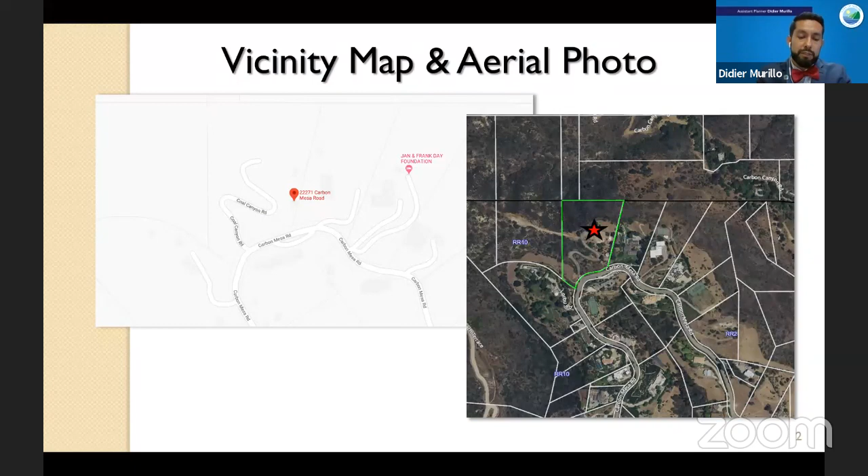Next slide, please. The property is located on the north side of Carbon Mesa Road along the northern edge of the city boundary in the rural residential 10-acre zoning district and is approximately 6.3 acres in size.

Next slide, please. The proposed scope of work includes a new 10,350 square foot, one-story, single-family residence not exceeding 18 feet in height, with an attached 820 square foot four-car garage and 992 square foot basement, swimming pool and spa, fire department turnaround and driveway improvements, retaining walls not to exceed 6 feet in height, decks, hardscaping, landscaping, 835 square feet of open air trellises, 976 cubic yards of non-exempt grading, a 5,000 gallon below grade water tank and a 25,000 gallon below grade water tank, and an on-site wastewater treatment system.

The below ground water tanks will allow the fire department access to water in case of a fire. Therefore, the accessibility of the water tanks and the location of the proposed project will benefit the surrounding properties as it will serve as a fire break and allow the Los Angeles County Fire Department to fight fires from that location.

The project also consists of site plan review number 18-027 for 2,611 cubic yards of remedial grading due to slope failures in 3 locations, and demolition permit number 19-022 to demolish the existing foundation, trash enclosure, swimming pool shell, on-site wastewater treatment system, and front yard gate and walls, which were left behind after the 1993 fire.

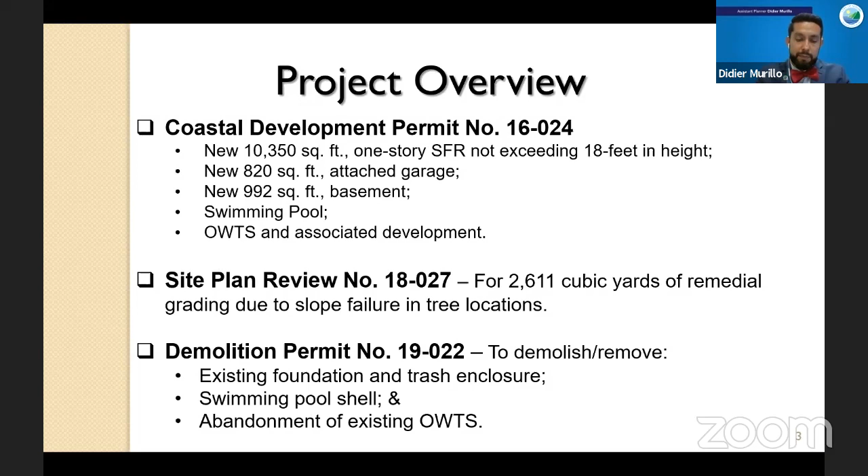Next slide, please. The project was scheduled for the August 5th, 2019 Planning Commission meeting. Staff requested a continuance of the subject item to allow the applicant time to provide an exhibit depicting existing and proposed fuel modification zones. Staff communicated directly with the Los Angeles County Fire Department Forestry Division and confirmed that the minimum requirement for a fuel modification is 100 feet.

With most projects requiring the thinning of vegetation beyond the initial 100 feet up to 200 feet. Traditionally, almost all projects that require a fuel modification plan have been designed to comply with the 200-foot fuel modification area. However, it is the Forestry Division policy to allow a reduction to the standard 200-foot fuel modification in cases where there are important biological resources, in an effort to avoid or minimize impacts to significant biological resources.

In these communications, it was confirmed that the required fuel modification for the proposed residence has been reduced to 100 feet, where environmentally sensitive habitat area currently exists. Here we have the approved fuel modification plan stamped on March 16, 2020. Next slide, please.

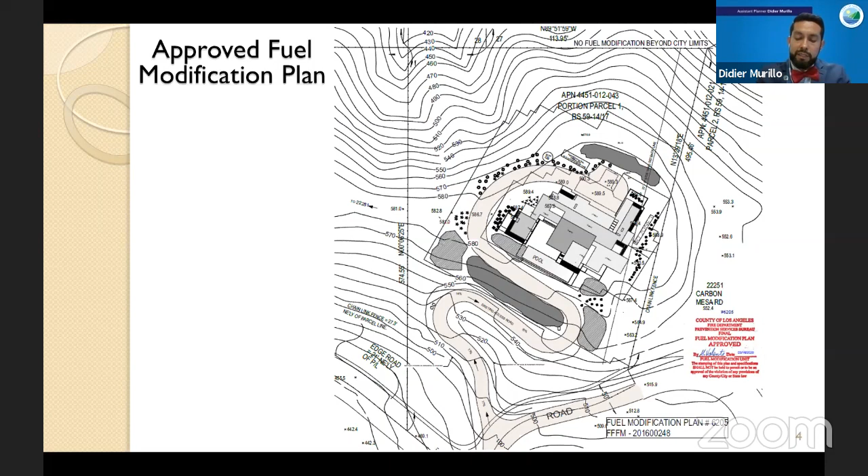Here we just have the site plan. Next slide, please.

The project includes site plan review number 18-027 because it proposes remedial grading to reconstruct the slope adjacent to the driveway and adjacent to the required fire department turnaround. The property experienced slope failures in these areas due to the drainage devices that were left unmaintained by the previous owner after the old Topanga fire destroyed the residence and associated development.

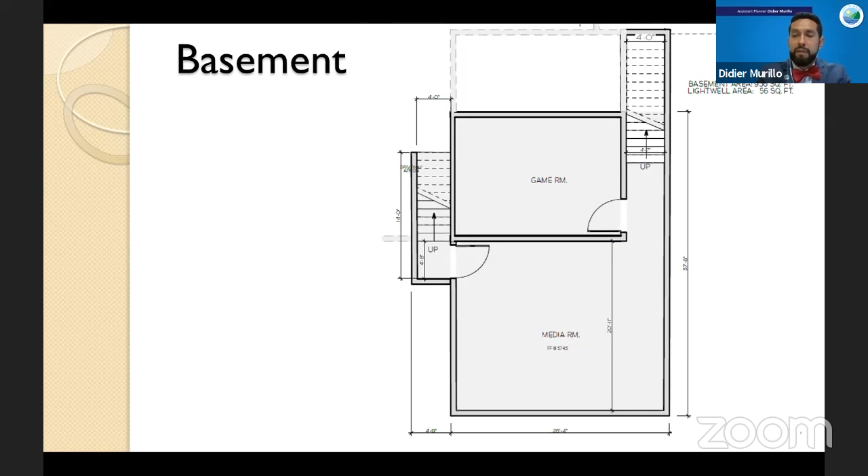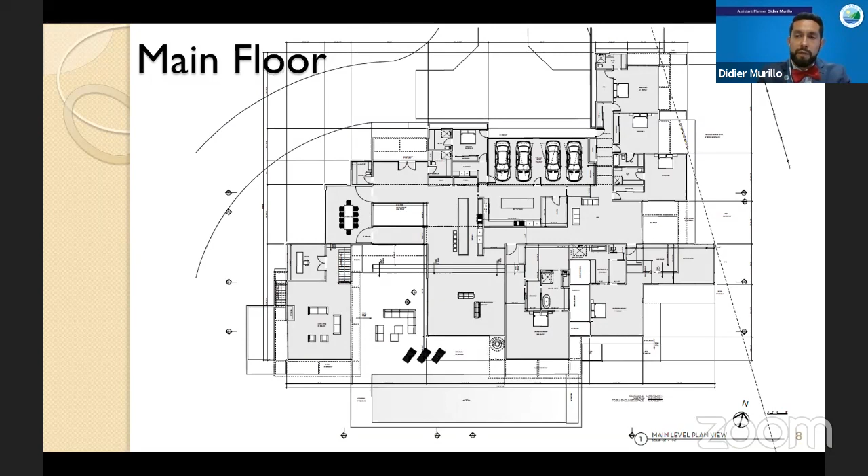The project includes a basement, which is comprised of 936 square feet plus 56 square feet for the lightwell area. Next slide, please. The main floor is comprised of a 10,350 square foot, one-story single-family residence, not exceeding 18 feet in height, with an attached 820 square foot four-car garage, for a total of 11,170 square feet. Next slide, please.

Here we have story pole pictures taken on Thursday, August 27, 2020, where we can see that the proposed project will be sited completely on the flat, previously disturbed building pad.

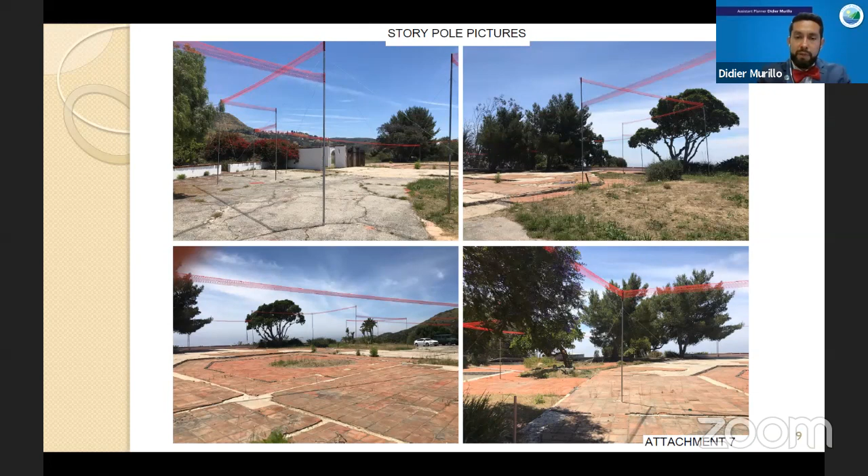Next slide, please. In summary, staff recommends that the Planning Commission adopt resolution number 20-59, approving the proposed project as conditioned. This concludes my presentation. The applicant and staff are available for any questions you may have.

Thank you. Okay, can we have disclosures? Who'd like to start?

Steve? Yeah, went up to the property. I had two big questions. One, there is nothing in the staff report that talks about a landscape plan, and I believe that's a requirement. And there's nothing in the staff report that demonstrates a slope analysis, and they're talking about stuff with slopes. So typically I would be able to deal with some of those issues with a site visit - I go up, take a look, see what it looks like, ask questions. So I scheduled a site visit and couldn't get on the property. The person who was Vitas, for a whole bunch of reasons why that didn't work out, Vitas didn't show up. I couldn't get on the property, so I had no idea, I couldn't get my questions answered. There's nothing in the staff report today that deals with a slope analysis or a landscape plan. So I'm going to make a motion once we get into this to continue this till some point in time till we can get that information. That's more than you want to know at the moment.

Okay, next. None for me. Chris, none here. David? I visited the site. Vitas was there. I walked around, asked him some questions, and then, like everyone else has, I've read all the correspondence that has come in from various neighbors.

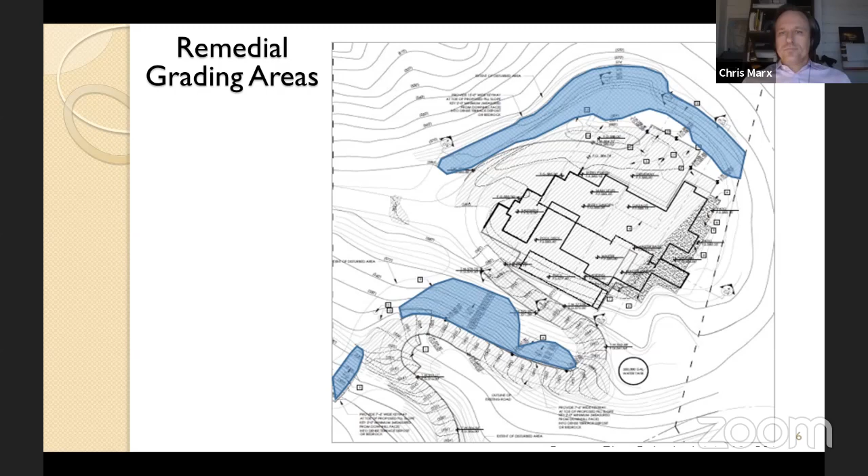David? Yeah, I guess I'm confused. If there's going to be a motion to continue this until information is provided in writing that isn't here right now, it does not make sense to me to then get into half a discussion now, then decide to postpone this and do it all over again. If we know ahead of time that this is going to be postponed, then let's postpone it. I just don't see what purpose this is going to serve.

Okay, point taken. Do we have a second? I'll second it for a vote.

But I'm only saying that if it's the intention of Steve and possibly Chris to postpone it - there is documentation that I believe is required, I'm not arguing - or a landscape plan, and if it's not there, how did this get to this point without that? So I'm going to make a motion to continue it, yes.

But we have to have public comment first. I would suggest that you give the applicant a chance to address the issue, and then if you feel that way afterwards - he can address it, but unless he's going to show me a landscape plan, I don't know what I'm going to see. Right? He can tell me about it. You can produce it, or you can explain why it's not required. No, he can't produce it tonight because we haven't had a chance to look at it.

It was supposed to be in the plans that the city sent us. It's identified as being in the plans, but it's not there. And if it's not there, I can't review it. If it's supposed to be there and it isn't, we shouldn't approve this piece of property.

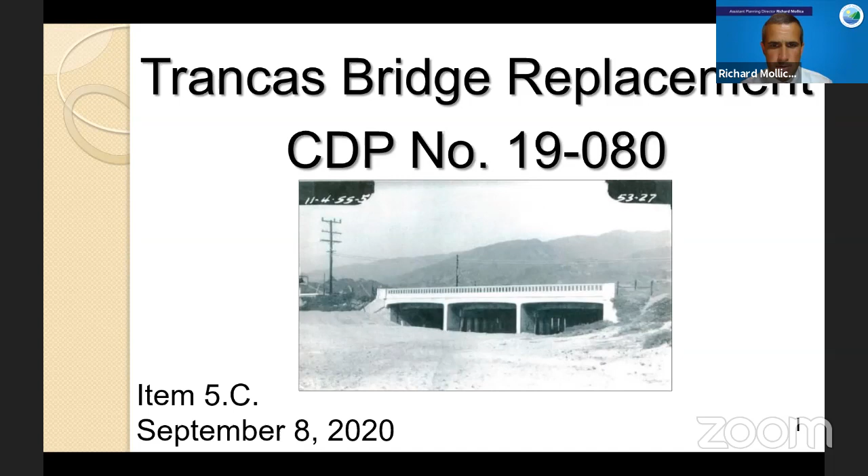As discussed, this is for the replacement of the bridge that's along Pacific Coast Highway that crosses over Trancas Creek and leads out towards Zuma Beach and the Pacific Ocean. If I may have the next slide, please.

This slide shows the project area, the area that was studied for impacts, or potential impacts, as part of the initial study that resulted in a mitigated negative declaration for the project. The different colors represent the different types of land uses. We have a range of land uses surrounding this, from commercial to residential to open space to public open space, such as Zuma Beach.

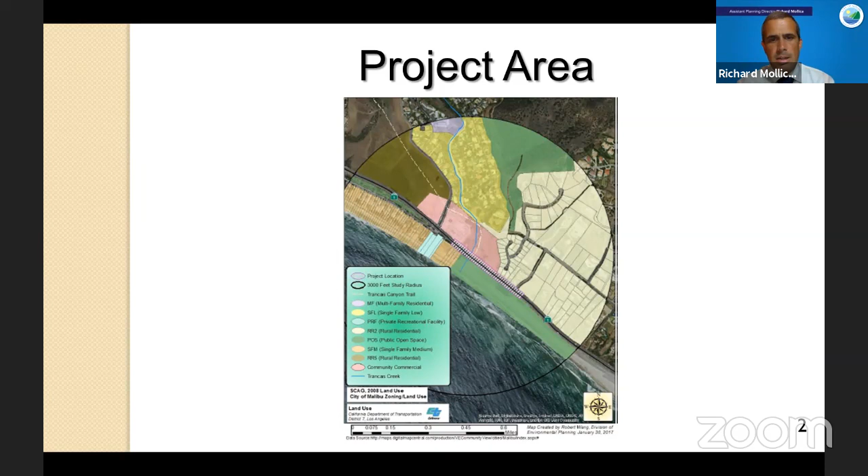The purpose of that wider span, rather than just replacing this in kind, is because there is talk of a potential project on the former Riders and Roper site, just inland of the bridge. That potential project would be undertaken by the National Park Service, as part of a Trancas Lagoon and Creek restoration program. As part of that, there was a request made to Caltrans by the Park Service that a wider opening be made so it would be easier for flows to make their way towards the lagoon, and also when water comes in from the ocean side, it would result in a greater amount of flow for the lagoon restoration program. If I may have the next slide, please.

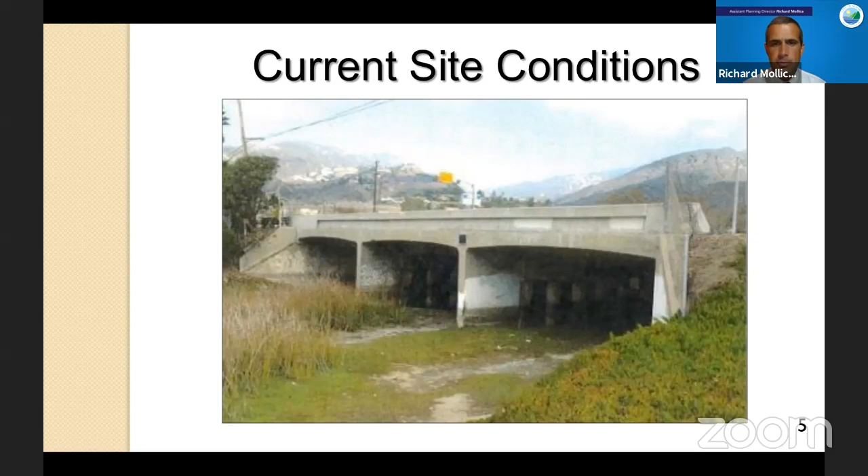If I may have the next slide, please. This is a picture of the current bridge. There are two piers, and also the abutments on the end. These currently face potential failure from erosion. Years ago, an emergency coastal development permit was issued to allow for temporary shoring to protect these foundations, in order to finish the work needed to design and conduct all the associated studies to bring us the bridge we have this evening. As part of this coastal development permit, the temporary permit issued for those erosion control measures will be finalized, and we'll be able to close out that permit with this CDP.

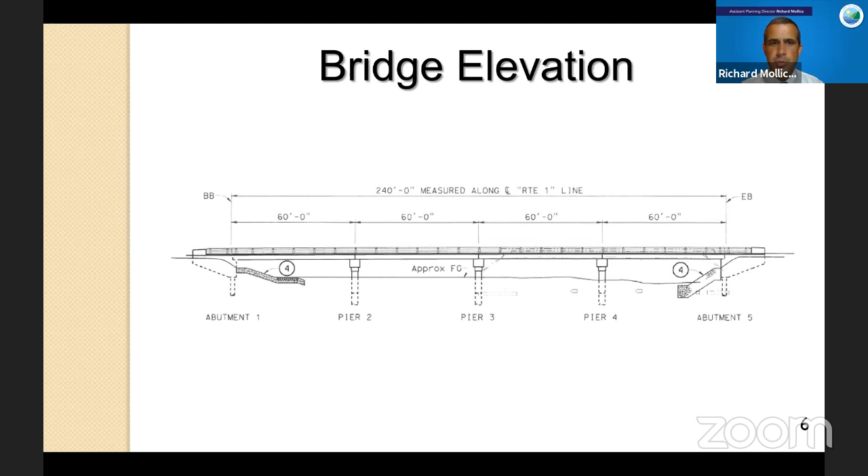Per the city's environmental review board, there was a request that the plants be locally sourced. As discussed in the staff report, that was included as a condition of approval, and it's something Caltrans could accommodate. There was also discussion that the planting palette should be as close as possible to that used by the National Park Service in their restoration project.

However, the issue is that project has not been designed yet. It's still in the design phases—they are working on obtaining the land, the funding, and then possible designs. So at this point it's hard to achieve that recommendation, and there's no timeline that would give us an estimation of when it would be feasible to know their planting palette. So these will just be locally sourced native vegetation consistent with what's in the area.

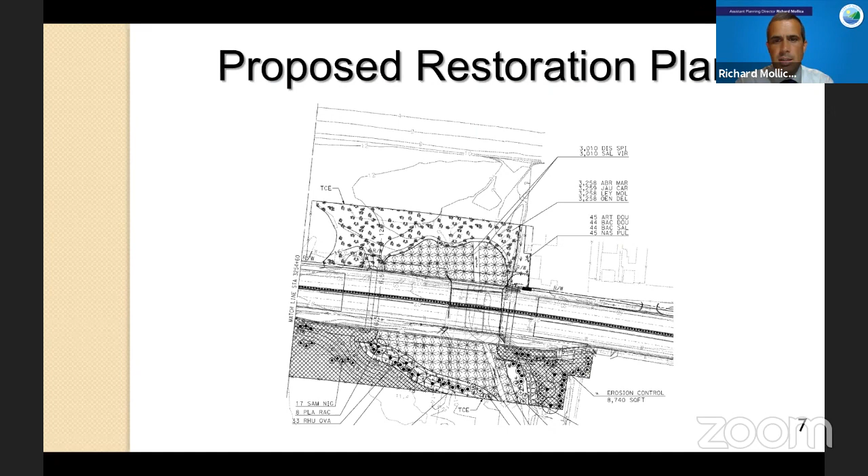The project will be accomplished in phases. The first phase will be to shift all traffic to one side of the bridge. There are 4 lanes of traffic right now, and the project proposes to maintain 4 lanes during construction by shifting traffic to the ocean side of the bridge. Then they would demolish the inland half of the bridge and construct the new inland half.

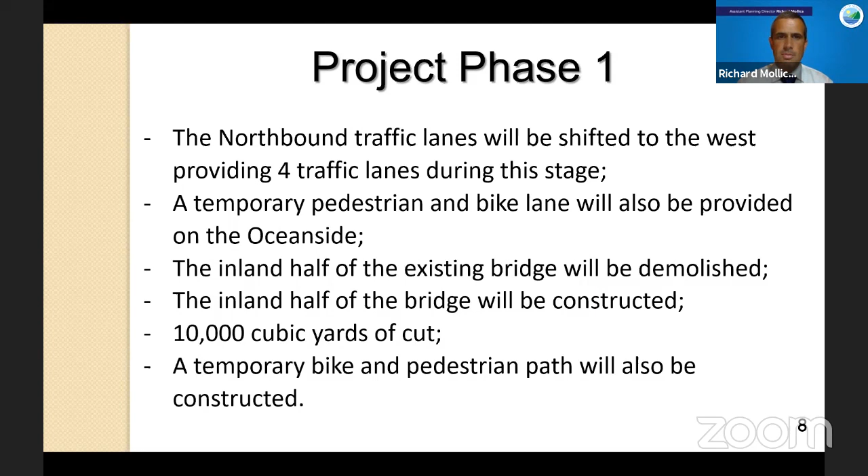There would be about 10,000 cubic yards of excavation, because the dirt under the existing roadway east of Trancas Creek needs to be removed. We're going from a bridge under 100 feet in length to one that's 240 feet in length, so that dirt needs to be excavated and removed. There would still be a temporary bike and pedestrian path while this side of the bridge is being constructed.

The second phase would be to shift traffic over to the newly constructed inland portion of the bridge, then demolish the ocean half, construct that half, with the same work and another 10,000 cubic yards of cut taken from under the existing highway. Upon completion, traffic would shift back to its original northbound and southbound configuration, with 2 lanes in each direction and the pedestrian path. That's the scope of work completed by the Caltrans project team.

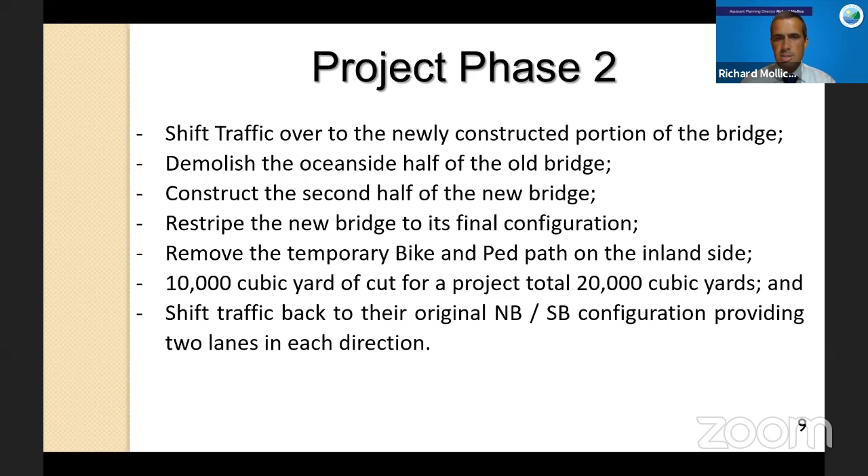There is additional work needed as part of this project. One is a water main that runs under the bridge currently, which will be temporarily relocated by LA County's Department of Public Works. The other work needed by an outside agency is that utilities need to be relocated off the bridge to a temporary configuration while the new bridge is constructed. Next slide, please.

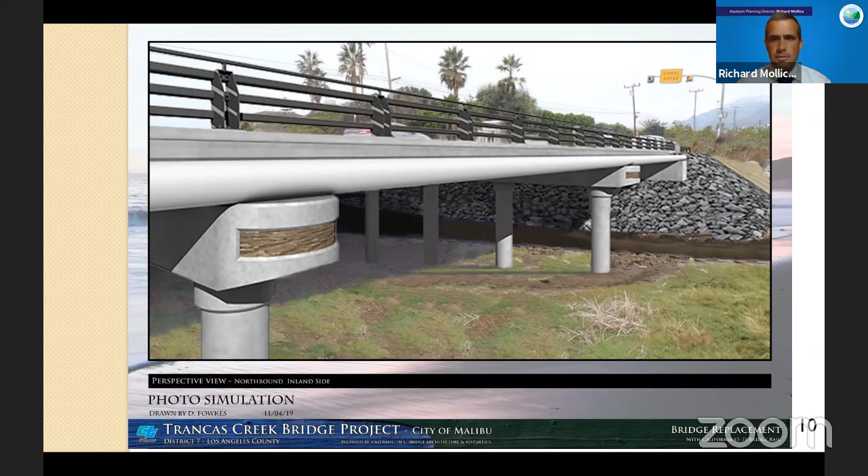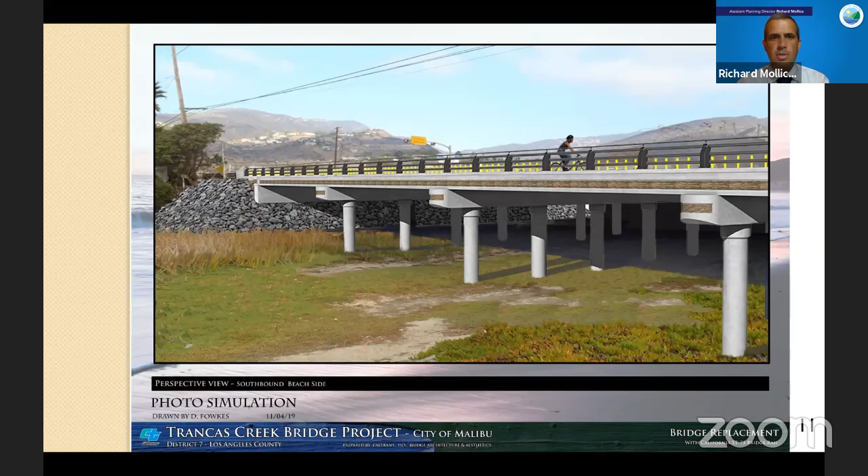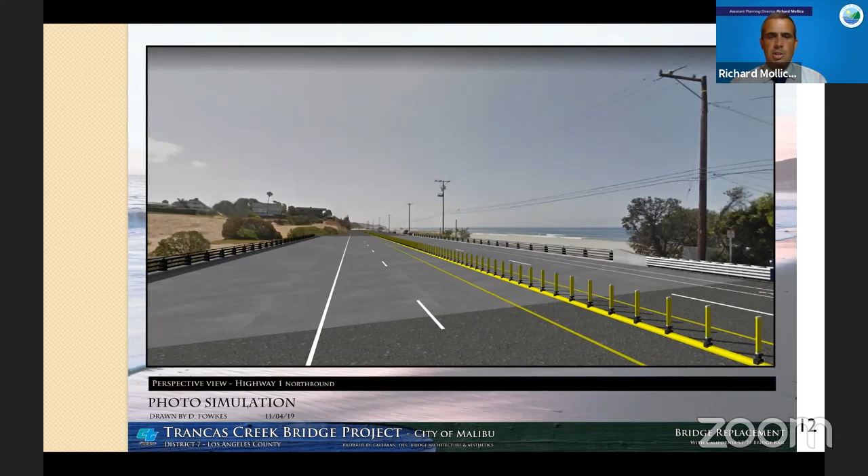This is a view of how the bridge would look if you were standing at, say, the Zuma Beach parking lot looking diagonally across the highway towards the Trancas Country Market. Next slide, please. And this is a view of how the bridge would look if you were to be standing on the bridge, Trancas Market to your back, looking towards Zuma Beach. Next slide, please.

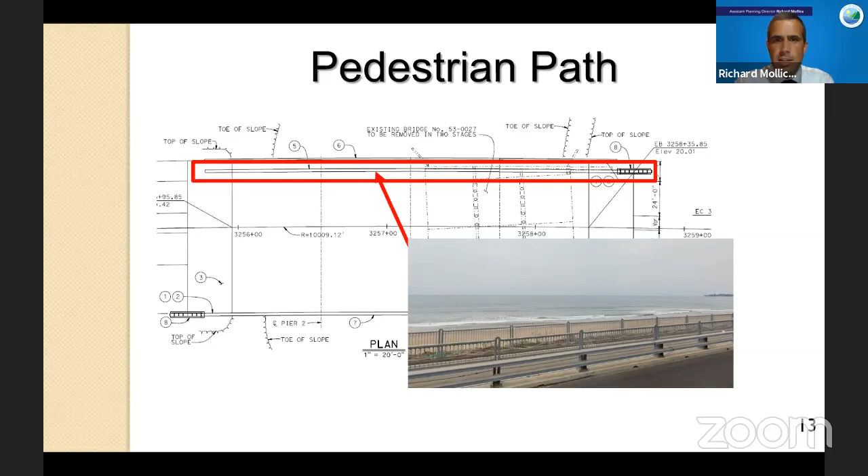Staff did receive 2 pieces of correspondence on this application. Last week, there was a piece of correspondence that brought up questions of the safety of the slope and the impacts of the temporary traffic signal. A response to that was prepared by Caltrans staff and distributed for public review. In addition, there were comments distributed today regarding sea level rise. On this application, the applicant can speak to it. The sea level rise study was reviewed as part of the initial study. There was further work done after the initial study. In addition, there was discussion of this project with the California Coastal Commission to make sure that the standards being used were appropriate. To date, there have been no negative comments from the Coastal Commission regarding sea level rise or this project. However, the applicant is familiar with those studies and could also provide further information.

Staff recommends adoption of the resolution, which would adopt the initial studies and mitigated negative declaration, and also recommends approval of the coastal development permit for the proposed project. I'm available for any questions, as well as the applicant. Okay, does anybody have any questions of staff before we go to the applicant?

Steve? Just one quick one. Richard, how long has this project been studied by God knows how many people to make sure we got it right? Any idea? I would say roughly 4 years. Primarily Caltrans, and the Environmental Review Board took a look at it. Anybody else? Coastal Commission took a look at it. There were also at least 2 public comment scoping meetings: one very early on at the Malibu West Swim Club, around the 2016 timeframe, and then most recently, 2 months ago, a public meeting on this. They've also been in coordination with, and they can correct me if I missed some of these agencies, Beaches and Harbors, Fish and Wildlife, and also the National Park Service. So a lot of people have looked at this thing.

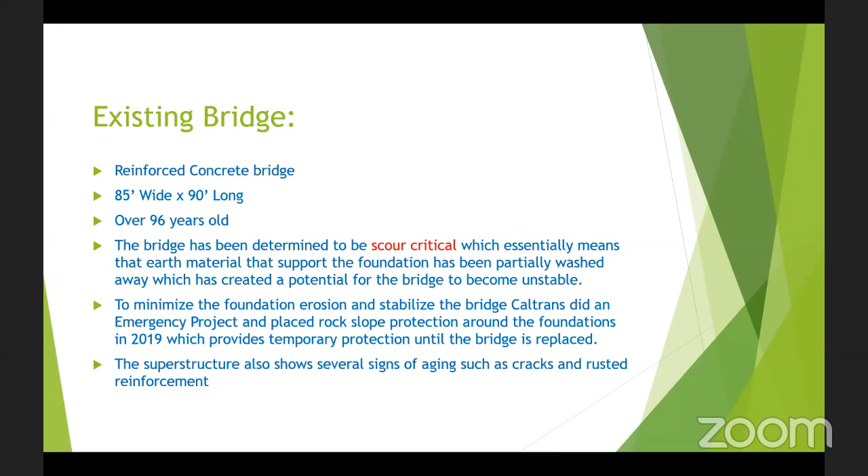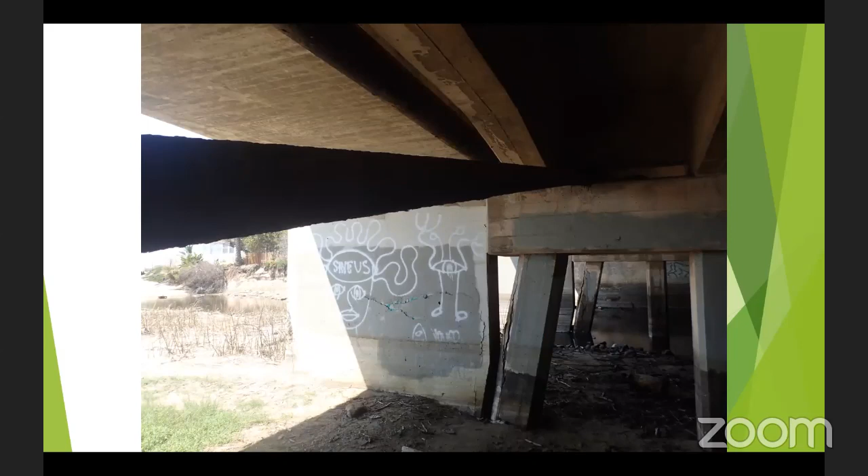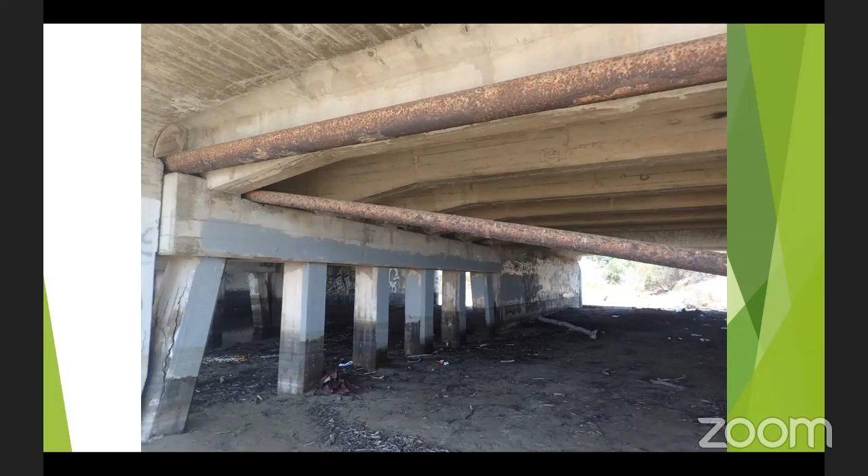This is a view of the existing bridge from the inland side. As you can see, all the steel is rusted and the concrete is busted. We have several of these pictures. On the columns, the concrete is falling apart. It has lived its usable life, over 96 years, and it's ready to be replaced.

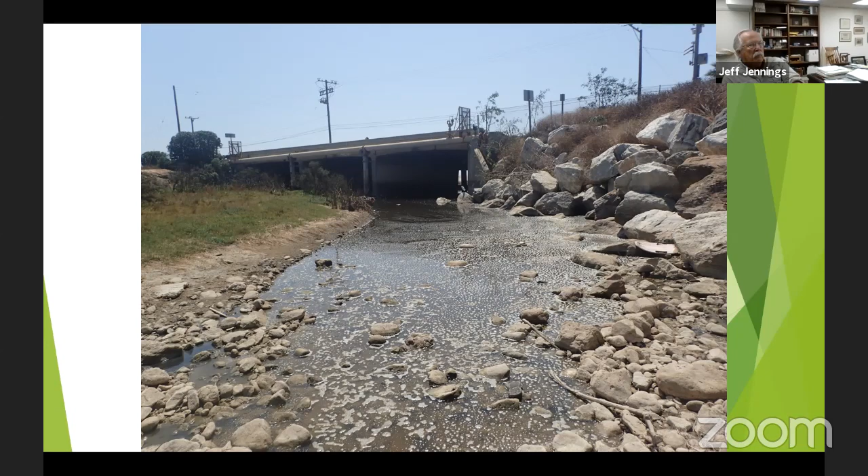Another view of the bridge. This is the low flow of the creek, which happens at the west end of it, right adjacent to the west abutment wall.

The replacement bridge is 109 feet wide by 240 feet long, in 4 bays of 60 feet each. Our current estimate is $13.5 million, and we estimate construction to take 27 months. We can only do work in the creek during the dry season, from April 15th to November 15th, a 7-month window for 2 years. In that time we must demolish the existing half of the bridge, remove the existing foundations, drive the piles, put in the new foundation, get out of the creek, and build the superstructure, all within 7 months.

That becomes very critical to starting the project, because right now we are aiming to finish this project by the end of September, meaning getting it ready to be advertised, and that includes securing all of the necessary permits, of which this permit is one.

We've put it up for a risk vote with CTC for October, and then we plan on awarding the contract and getting construction started by February 1st. That gives us about 2.5 to 3 months to do a whole lot of work that needs to happen before the dry season starts, such as relocating utilities—that 16-inch water line needs to be moved out—installing a temporary light at Guernsey, and shifting traffic to the west side. There's a whole lot that needs to occur before we can get into the creek and start demolition of the bridge, so it is very critical for us to get this permit as soon as possible.

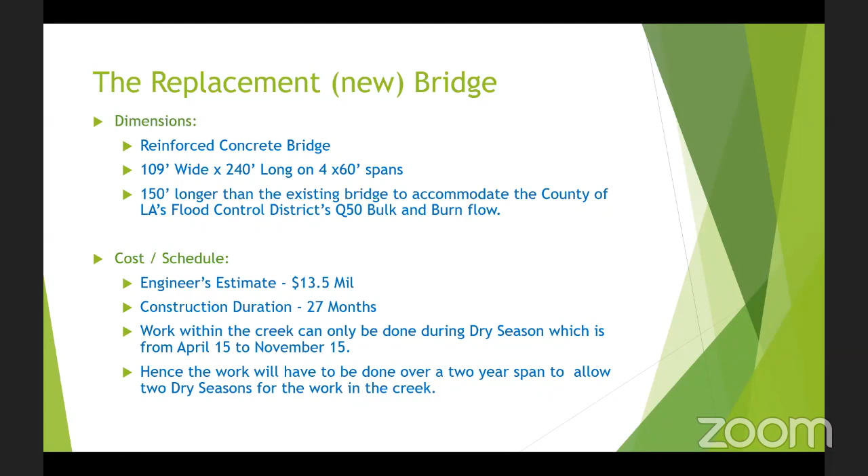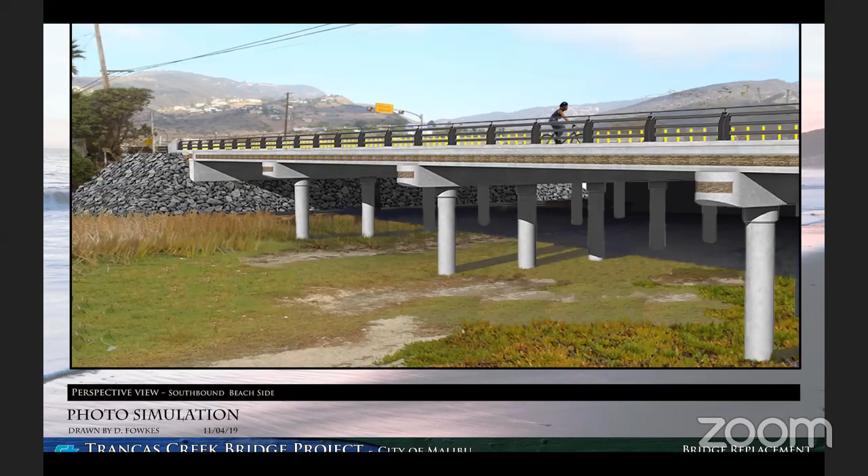Richard chose these renderings. This is a rendering of the bridge. The new rendering will be slightly different because of the change the city requested, to move the bridge barrier to the inside and separate the bike and traffic from the pedestrian area. The same bridge railing will be used, but moved inside, along with a new bridge railing that Richard showed.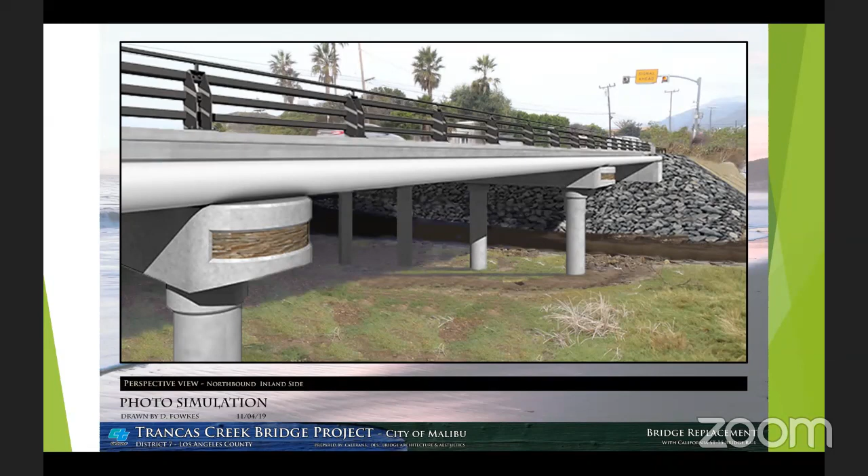This is the rendering from the inland view. It will look the same as what you see here. This is the street view.

Let's go back to that slide. On the right side, Richard talked about this—the barrier you see on the far right will be moved to where the outside line is, where the bike lane is, so there will be a separation. That becomes the bridge railing, and then there will be a pedestrian railing at the edge of the bridge, a 2-inch pipe, see-through railing. So we'll have two railings: one for traffic, one for pedestrians.

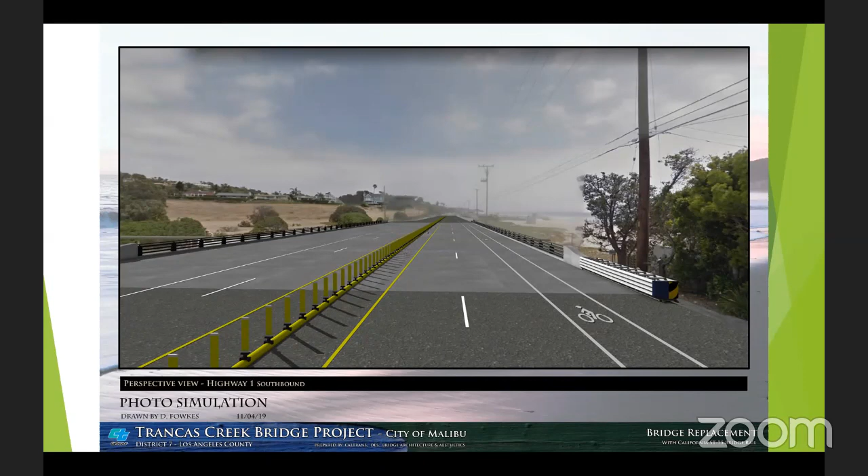Okay, and these are the construction staging. Richard went over this, I'll go over it quickly for both stages. The first stage is to move the 4 lanes of traffic to the ocean side on the existing bridge, and remove the inland half of the bridge and construct a new one.

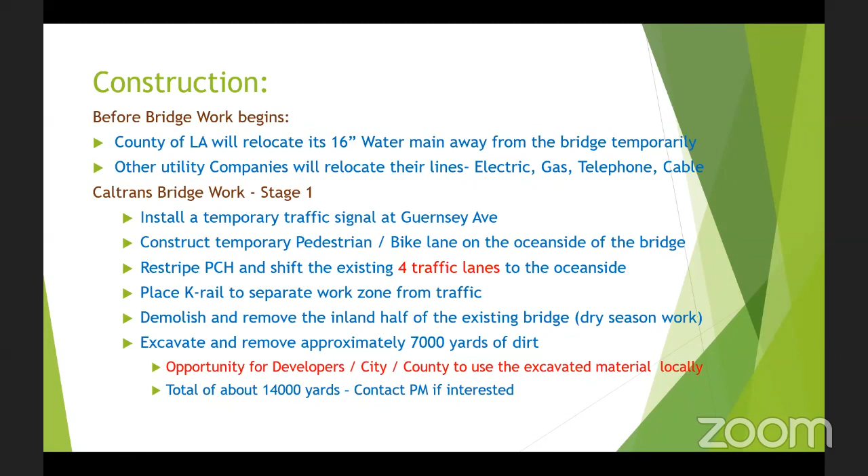Next slide, please. And then the next slide. I think I'm pretty much done with this presentation. I just want to get into some of the questions that were raised regarding the sea level rise.

We had provided a report to the city, which was reviewed and approved. So when it comes to the sea level rise and the water, actually the bridge needs to be above the highest water mark that can happen. There are 2-3 different sources of that water level. One of them is from the ocean side, and on the ocean side we have 3-4 different elements.

Such as the mean high water mark, which for this site is 5.24 feet, 1% extreme exceedance, which is 2.66 feet, and a 2% incident wave run-up, which is 0.96 feet. Putting all those 3 together, it's 8.86 feet over the existing water limit.

And then on the other side, we have the sea level rise for the Santa Monica area for the year 2100, and that's 6.8 feet. We don't accumulate the two together, we take the worst case scenario between the two. So 8.86 feet from the ocean side is the highest water mark that we can have.

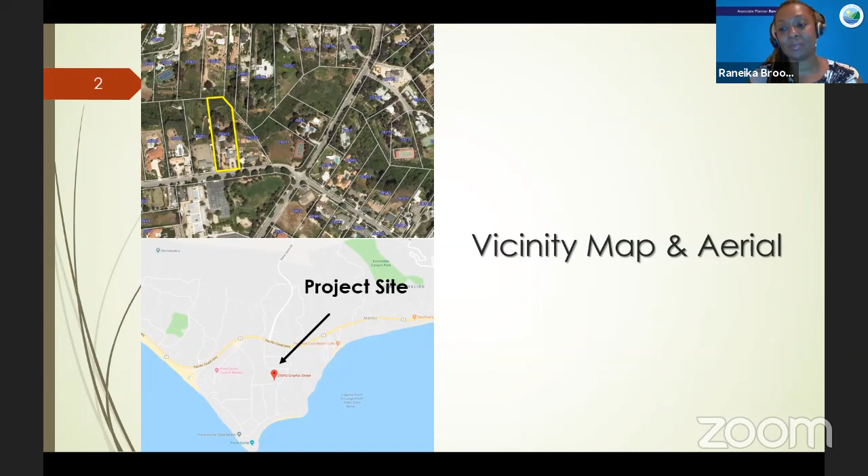Next slide, please. The project consists of the demolition of an existing residential development totaling approximately 4,700 square feet, and the construction of a new 2-story residence just shy of 6,400 square feet. That square footage includes an attached garage of 966 square feet, covered loggias that add up to about 650 square feet that are split between the first and second floor. The project also includes a new on-site wastewater treatment system and associated development. Next slide, please.

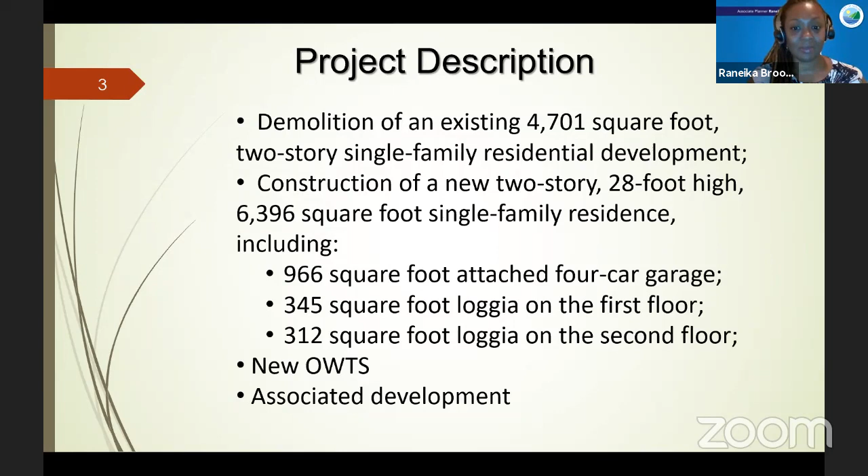As directed by the Planning Commission, the applicant met with the concerned neighbor on August 11th, 2020. Staff also attended this meeting, which was held virtually on Zoom.

At that meeting, Mr. Stockwell, the concerned neighbor, expressed his concerns about the configuration of the second floor area, which he stated had the potential to create shading and invade the privacy of his backyard and patio areas. To minimize potential shading and loss of privacy, Mr. Stockwell suggested making additional modifications, including removal of approximately 600 square feet of the northern portion of the second floor, the end of the structure opposite Grayfox.

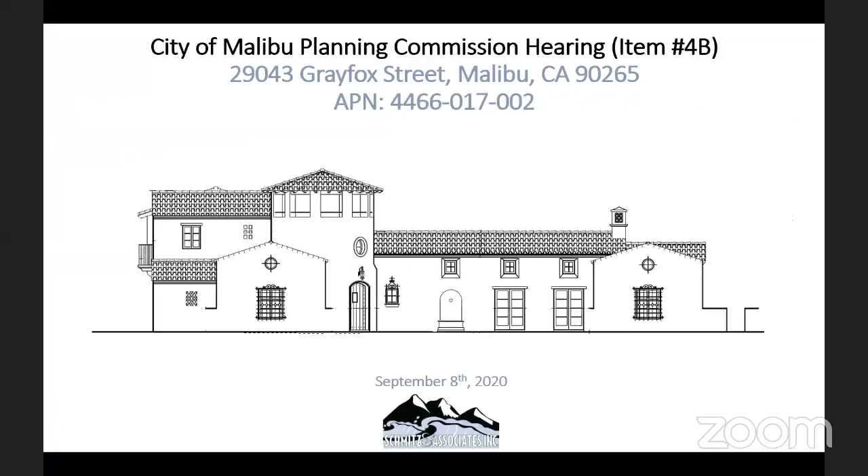Can I go to the next slide, please? For the record, this is Don Schmitz. I am the representative for the applicants, John and Tatiana Atwill.

I want to go over the history of our outreach to our neighbor, Mr. Stockwell. My clients met with him back in 2016. The original design of the house was so that the second story would be on the easterly property boundary adjacent to Mr. Stockwell. This made architectural sense because my clients wanted to maximize the sunshine coming into the pool on the design and did not want shading in their yard from the second story. But Mr. Stockwell did not like that concept, so the design was flipped, putting the second story on the westerly side of the property, away from his house.

My clients then met with him in October of 2018, discussing the project and the house in relationship to the size of the lot, and that there were bedrooms on the second story. They met with him again, both Mr. and Mrs. Atwill, on November 1st, 2018, discussing the height and massing of the property and his concerns about impacts to the privacy of his property.

Next slide, please. And I do understand from the correspondence of Mr. Stockwell that he does not concur with this meeting timeline.

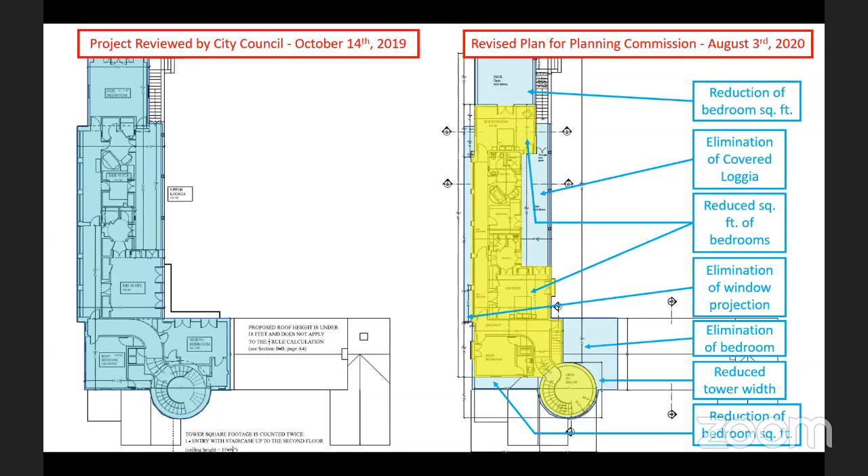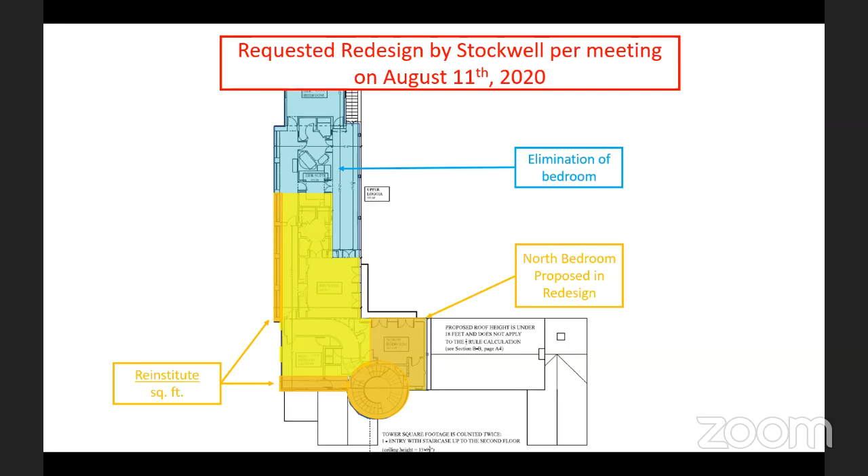Next slide, please. Unfortunately, this results in a completely dysfunctional floor plan layout for the applicants, who would now have three small bedrooms bisected by the hallway coming out of the tower, which is how you access the second floor. So that is just one of the reasons why the Atwills are simply not willing to do this. Next slide, please — already shown by staff.

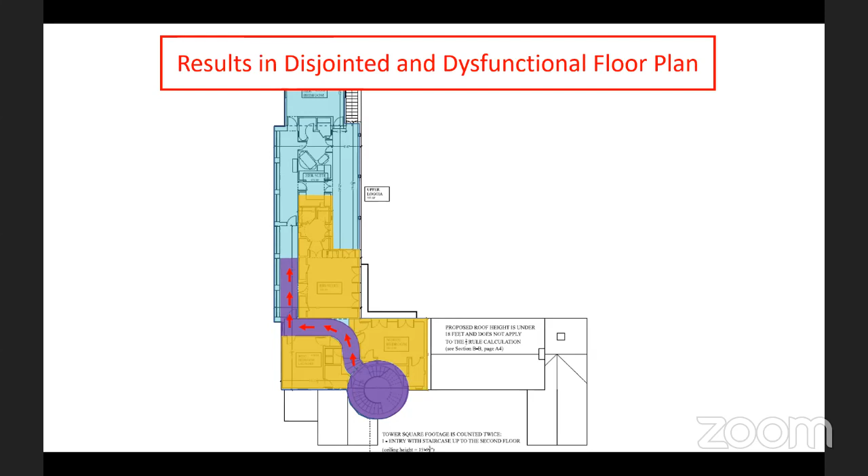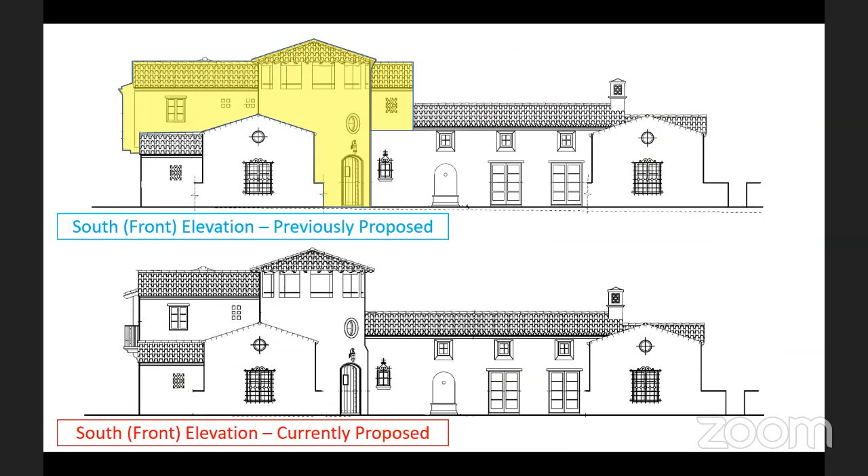Next slide, please. We want to point out that originally the second floor was 3,073 square feet. We reduced it by 1,233 square feet — that's a 40% reduction, getting close to almost half — and that reduces the second story to 1,840 square feet. That's definitely a good faith effort. Next slide, please — this shows and illustrates the modifications to the project. Next slide.

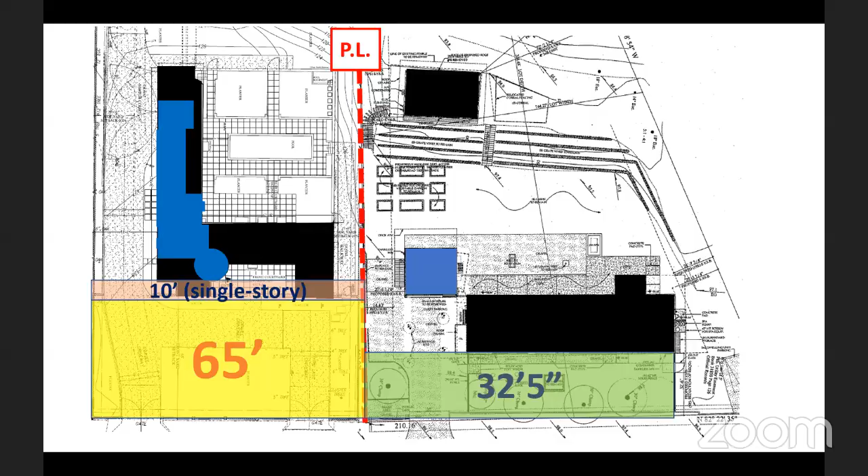Mr. Stockwell's asking us to put that back in. We think that's counterintuitive to address neighborhood character concerns, which is what this is supposed to be about.

Next slide. So you can see on these elevations seen from the street, originally we had a 45-foot wide second story frontage facing the street. Mr. Stockwell's frontage facing the street is pretty nominal, 26 feet. We reduced it to 36 feet 5 inches.

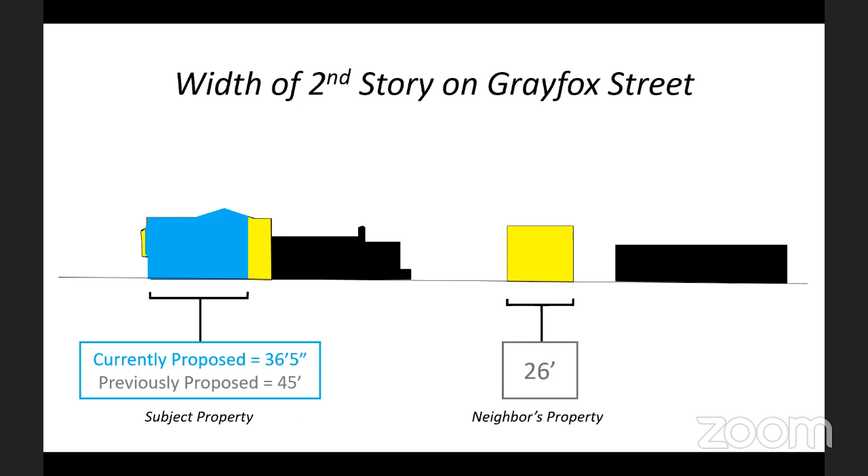Next slide. Our neighbor just 2 doors up has a 110-foot 2-story facing the street. Again, counterintuitive that to address neighborhood character, we would again widen out the second story facing the street to 45 feet. Next slide.

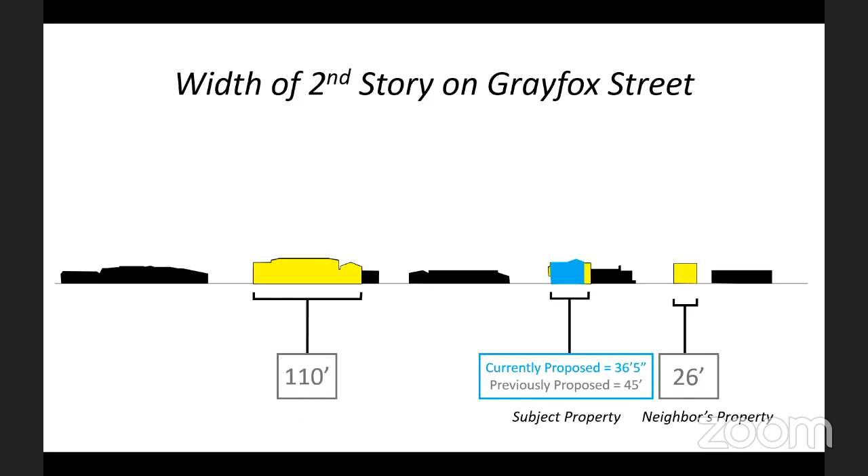So the surrounding neighborhood, 57% of the homes are 2 stories. Next slide. 3 of the 5 homes on this section of Grayfox are 2 stories.

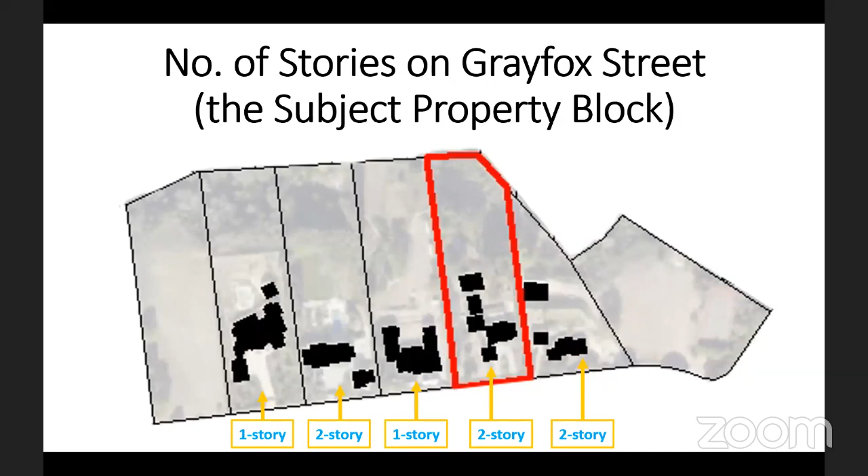Next slide. And yes, statistically and with very good records and GIS analysis, the average second story is 1,842 square foot. Next slide, please. And you can clearly see this from a number of the homes in the area.

So with that, I'd just like to retain the remainder of our time for rebuttal. And I'm available at this point to answer any questions that you may have.

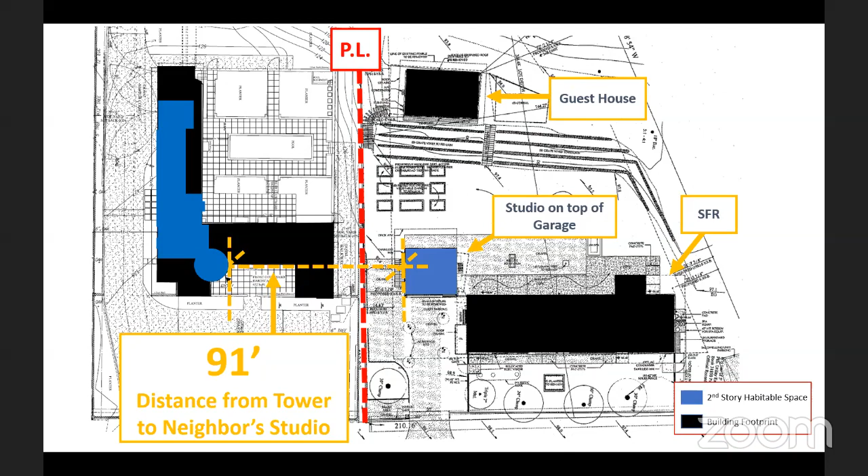The tower is 91 feet away from the closest part of his property. Next slide, please. And it's 121 feet away from his house, and by the elimination of the bedroom on the easterly side, we've increased the privacy for Mr. Stockwell. And yes, we did originally envision having the second story on the easterly side of the property. No, we never designed that and submitted it to the city because we did try to be sensitive and respond to Mr. Stockwell.

As for Mr. Hill's comments about blockage for the site plan review for the second story on the neighbor to the west, there is no primary or any view blockage whatsoever from the property to the west. Mr. Hill's asking you to contemplate denying the application on a speculation of a view blockage that doesn't exist for a future owner, when the current owner has submitted a letter of support to the Planning Commission. I think that's a little over the top.

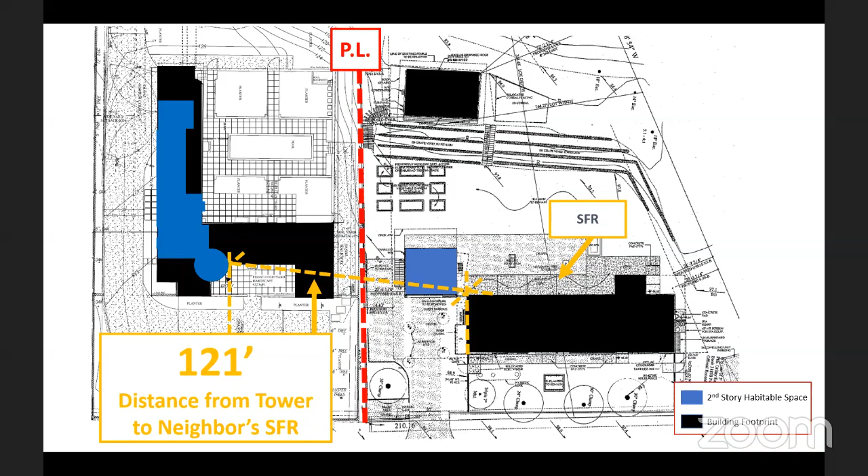Next slide, please. We have done a significant redesign, and it wasn't just to simply reduce the square footage, although it was a significant reduction to bring it down into the community average, which is what this very Planning Commission told us they wanted to see. It wasn't just making it more skinny. We eliminated the whole bedroom on the far northerly prolongation of the area. It's a significant reduction. And the reason we eliminated the bedroom on the easterly side of the tower, again, because that was a portion that was closest to Mr. Stockwell's property.

Stockwell's property. We did try in good faith to incorporate the comments he had given us in no less than 4 previous meetings to discuss the project design. Meetings he had directly with my clients and then ultimately with myself as well.

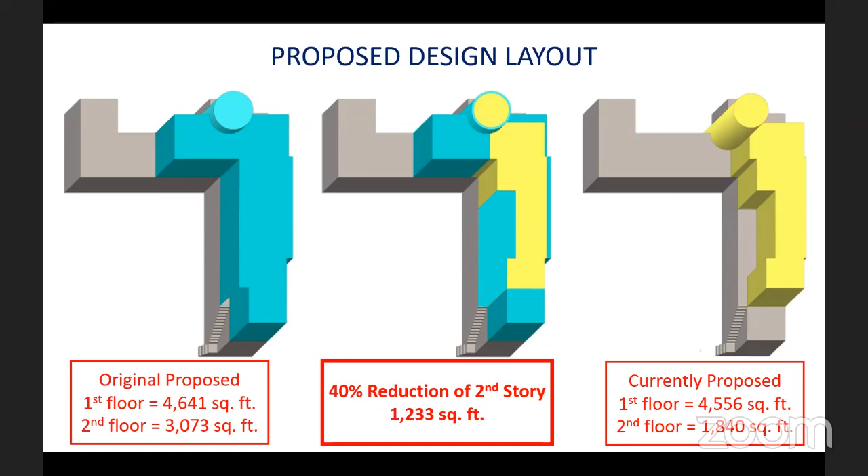Next slide, please. The average second story in the area is 1,842 square foot. Ironically, in the first Planning Commission hearing, Commissioner Craig Hill had indicated to me that if we could substantiate that the second story was more consistent with what was in the neighborhood, he'd be supportive of it. And this commission has oftentimes allowed a larger square footage than the average, just so long as you don't go too far. But we are right there down the line with the average for the second story in the neighborhood.

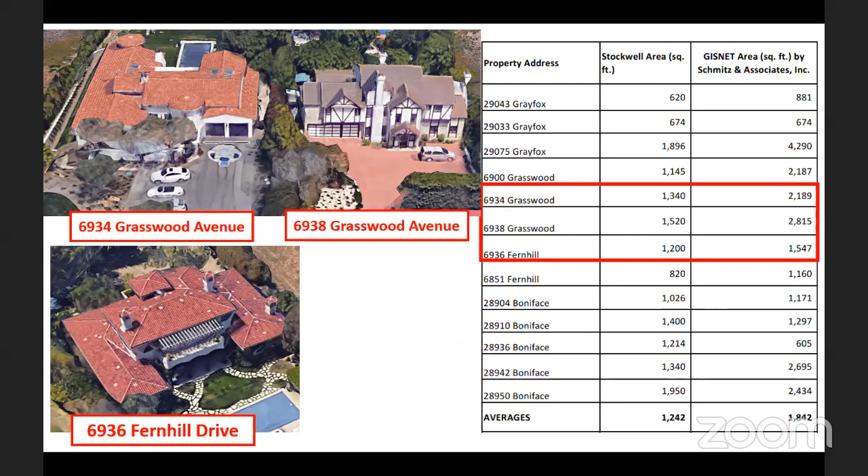Next slide, please. And our numbers are predicated upon building permits, coastal development permits, the assessor jackets. Next slide, please. The three houses which you can see right here highlighted, we have actual building permits for them. We know that the numbers are accurate. We know that the second story as designed is consistent with the neighborhood average. Next slide, please.

Look, the project complies with the municipal code and the LCP development standards. We're not cavalier about the concerns of Mr. Stockwell, far from it. But at the end of the day, what's controlling and supposed to be the basis of review and approval is whether the project comports with the development standards. It cannot be a popularity contest, and a next door neighbor cannot have veto power over an application in front of the city.

3 out of the 5 houses on this street are already 2-story. 13 out of the 23 properties in the surrounding neighborhood are 2-story. The project's second story has been revised from 3,034 square feet down to just 1,800 square feet and change. That hurt. We didn't like doing that, but we did it because that was the direction the city gave us, the council gave us, and the commission gave us.

We thought we had done a project design that was very sensitive, and you couldn't see much of that second story from a public viewing area, that being Grayfox itself. Nonetheless, we were told to go and modify it, and we did. A big chunk of that reduction was on that second story on the northerly prolongation, which it doesn't seem we're getting much credit from our neighbor for.

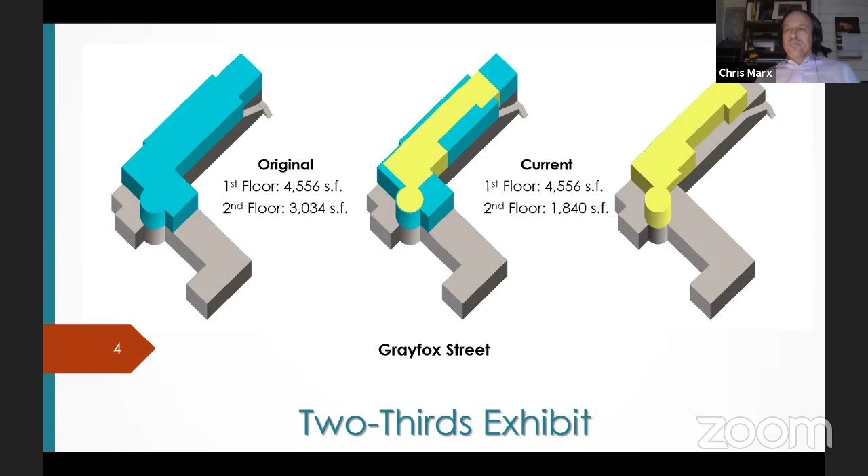I got a question. What's a 2-2 vote get us, Trevor? More debate. So, no. Does it pass or does it fail? It fails, but our direction here is to continue to debate the issue.

I mean, we're to come to a... No, if we vote 2-2, the motion to approve the project fails, period, and it's essentially disapproved and will probably then go back to the city. And then the other side is, you wouldn't be able to get consensus on a motion to deny.

So then we're stuck again. Where do we stop? If it's a 2-2 vote, is it denied, and then it goes to the city council, right? It's not denied. There's no motion to deny, and a motion to deny wouldn't pass either.

So you just get no result. I don't know how it gets back up to the city council. I assume we would have to go there, but... okay, so if it's a 2-2 vote, can Atwell build this project?

No, I'm sorry, Trevor, go ahead. I'm just trying to understand. No, they won't have an approval if you're sitting in a deadlock situation, if you can't get a motion to approve or a motion to deny.

So we would continue the debate, see if there's more information that could lead to a resolution everyone could agree on. When you say continue the debate, does it come back to the planning commission? Or could we continue and get more information from staff, or continue discussion here tonight to try to reach a resolution?